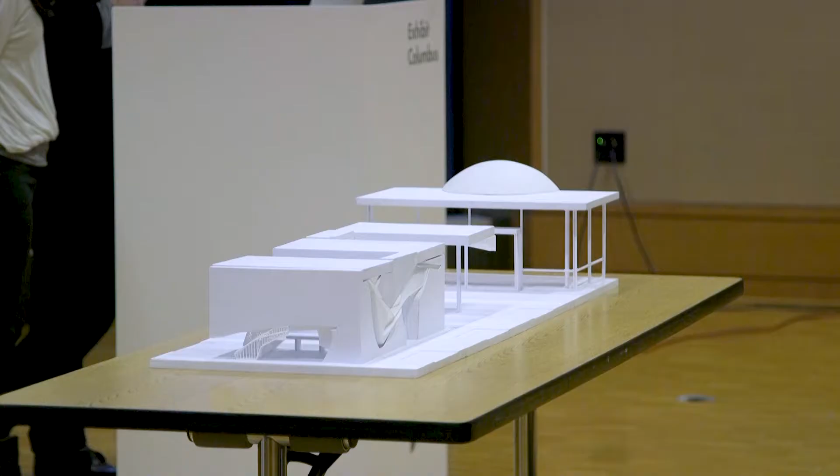It's very easy when you first view the bank to think it belongs to that moment of modernism in its purity, in its relationship to similar buildings of the time. Here's Mies's Crown Hall, designed in the same year, but the bank was ultimately built a little bit later, as well as the Philip Johnson Glass House. But if you look a little closer at the Union Bank, there are some anomalies going on that I think point to Mies's interests that begin to develop a little later in his career — or rather, Saarinen's.

It's often said that the relationship of these domes, the form of these domes, came out of the honey locust that exists throughout Indiana. The role of them really takes on the idea of this voided honey locust, as though they somehow exist within the space, but in voided form. This idea of the implied object in a space was something we saw throughout his work, and we tried to build upon it, especially in this building.

An interesting trick that Saarinen often played: he had a really incredible way to think about the relationship between structure and light — things that in many ways exist in different realms, one having the ability to communicate very poetically, and the other often dismissed as a kind of engineering exercise.

What you see increasingly in his work later from a formal standpoint, if you go to Dulles Airport, you get this trick of the structure reaching up through a hole, coming back down and suspending the roof. Not only does it pull off that structural look-mom-no-hands trick, you're also getting light moving down into the space, which further accentuates that idea.

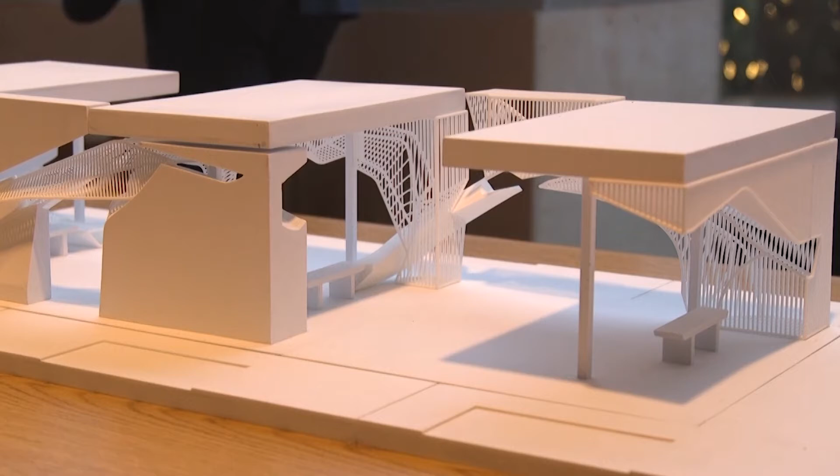And finally, then we wanted to create a series of voids and erasures that happened within each of the walls, within which those objects would float freely, so that you get light moving down in the cracks of each one. So you start with the basic solid wall, you introduce a void, and then within that void there's an object placed. The idea being that there is a very loose fit relationship, like the relationship of the column in Dulles Airport, that allows light to move down in the cracks and mysteriously emerge within the scheme.

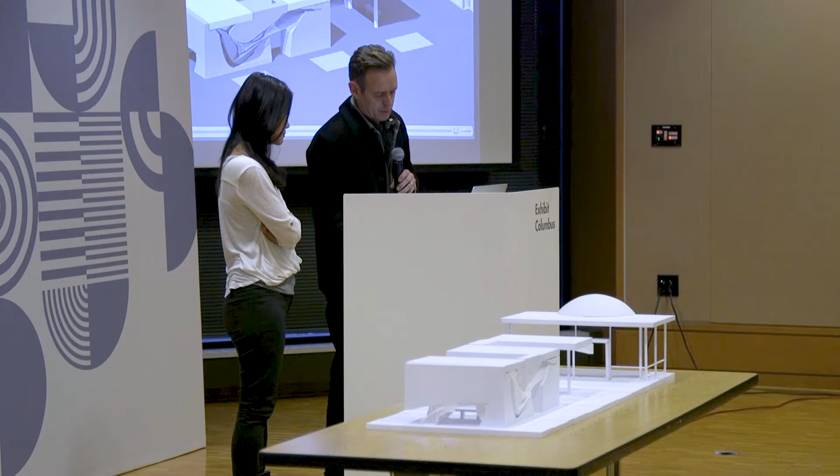This just gives you some sense of the sectional relationships going on in the piece. So I was talking about that idea of the loose fit. What happens within each of these walls, regardless of whether they are a porous wall or a solid wall, is you're getting these objects that are kind of suspended in the walls, and you would get light moving through each one of them, but not necessarily allowing for direct vision through them.

And this gives you much more a sense of the qualitative aspects of those, where you not only get light moving through each of them, say in a place like that or that, there's also the production and multiplication of the filigree elements through shadows.

So here are some sections through our project, and in this case, you really understand the kind of loose fit of the embedded object, whether it's solid or more filigree frame, and how that has these kind of cracks and allows you to see light in.

Also, you can still start to see how some of these objects become actual elements that you can sit in. So there are benches, as well as, and once we started doing this kind of erasure, how much of the frame do we need to keep so that we can still hold the idea of the implied volume of the overall box?

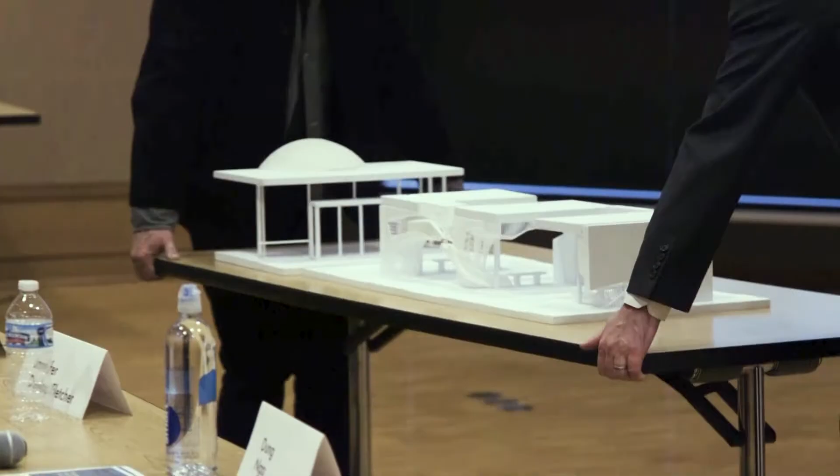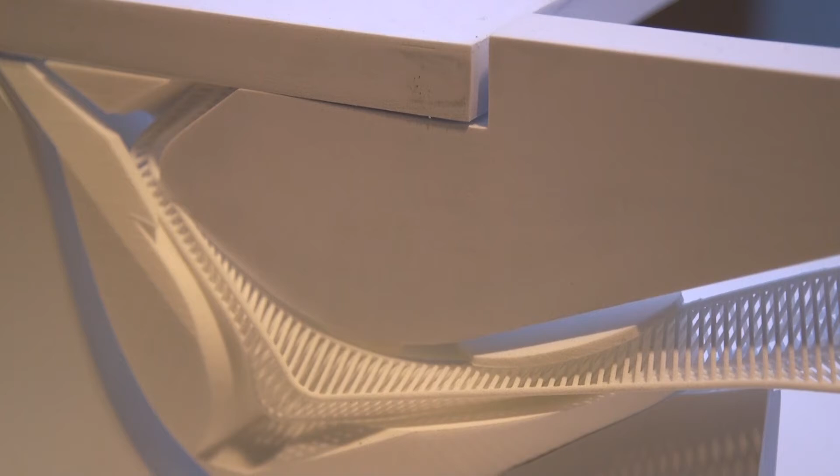Dwayne's gonna quickly flip the model so you see the other side. So as you round the corner, on this corner view, you start to see the two L shapes making the overall volume, and you can see them in relation to each other. One, this kind of lightly filigree frame that wraps around, and some pieces come down and become a bench element.

And then this is the view from the interior of the courtyard, where you really start to see the juxtaposition of the two solid void relationship and how one becomes the other and then kind of reverses itself. And there's just that relationship of seeing the buildings through this frame or being blocked by the frame, and then it reverses the other way.

And I think the idea is that we hope to really activate the plaza itself. And there were a few other ways we're doing that. So initially, as we were mentioning about taking advantage of the existing canopy and using these two L-shaped walls to imply the overall volume of this block, we actually think that that strategy would also help if we can activate the overall plaza and not just that block itself.

So we actually want to extend elements of this project into a few other places. So here in this corner, to kind of capture the larger space of the interior courtyard, and then actually extend another element by Jackson, and then that allows you to have a bigger understanding of the impact of the project.

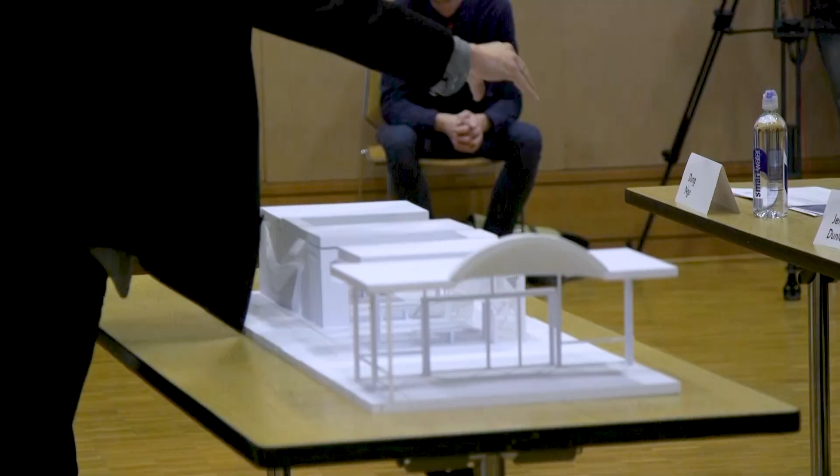Could you comment on the decision to put the more opaque wall on one side of the site versus the other, urbanistically? When we noticed that on the site—so the courtyard operates like this, and there's a pathway at the back—we found that very few people were coming this way and walking into the building here. The majority were walking into the park and cutting that way. So it was really about leaving this end open and this end marking the object.

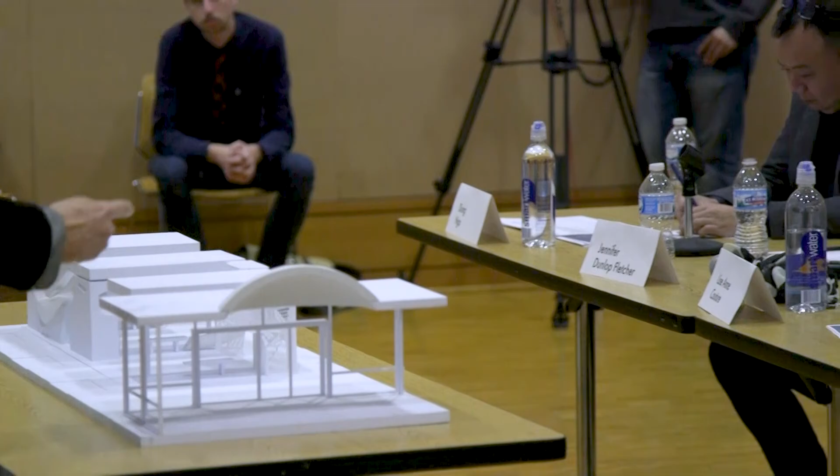We also didn't want a sense, if you were using this space, that it lacked a level of porosity that was inviting. So it was important to us that if you're coming from here or if you're in the building, you could see all the way through it. And even for the actual office building here, we didn't want to be blocking that, so we made the face on this corner.

The balance of the idea of containment was super important here. We wanted it to feel, on one hand, perceptually contained, but we didn't want it to feel like you had to enter into an object.

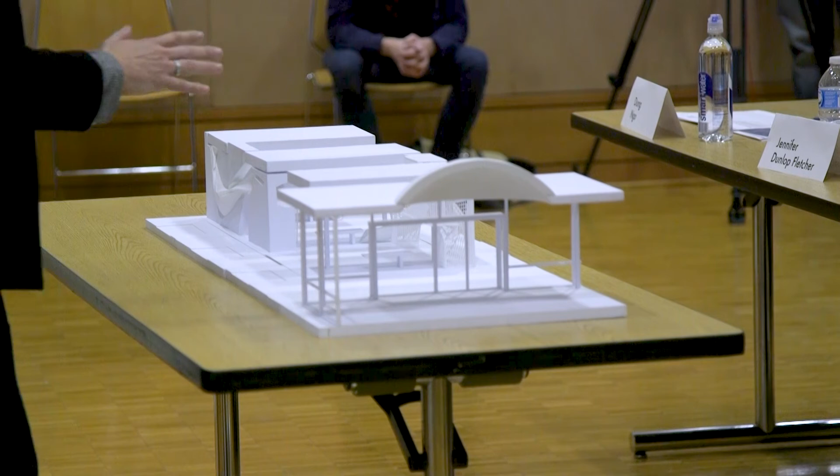Just quickly, what is the scale—like this arched opening, and then you have another doorway over there? The goal here was 6'8". This is about 10 feet, but it varies because there's a little bit of slope in this direction that's not on the model.

Just an experiential question—it doesn't touch the ground very much. It's very lightweight, with the exception of the bench that is coming down here.

Did you consider the ground as having any significance in your work here, in terms of patterning that's inside the bank? I don't know that I have a good answer for that. One of the mandates was that we weren't supposed to put anything on the existing building, so we were careful not to have to do that. But I think we would think about how we'd do that—we were thinking more about the level of the existing benches than about the actual ground plane, like the canopies and existing benches, how to incorporate that.

So from inside the bank, your view out now, with the solid wall—was that facing west there? What do you think the view of the park is now with the structure in place? We think from the doors you're going to see the pavilion. We felt like the majority—because the rest of the bank and the other building still allow for that—it was okay that within that view it was mostly through our pavilion.